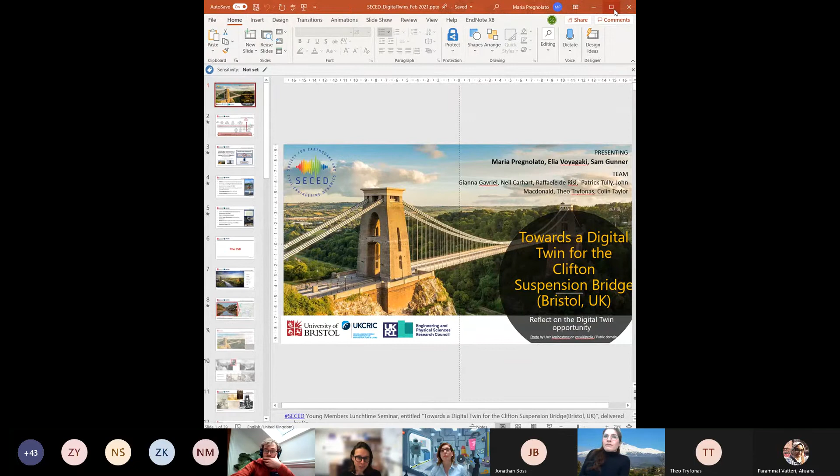Thank you, Valentina. Thank you so much for inviting me, for the nice introduction and everything. Can you see my screen? Yes, I can. Perfect.

So thank you so much. It's a pleasure to give this talk, especially because it's actually the first one we are giving on the first outputs of this case study and the future steps that we are going to encounter.

So the term digital twins has become very popular nowadays, and it's really propelled us into a sort of future dimension. But actually, the concept is not new at all, and has been followed by mankind for centuries. For example, even in ancient Greece, we can find mechanical twins of the solar system with which people were trying to study the movement of the planets. Of course, however, we have to wait for advancements in computing technology in order to really arrive at the difference that led to a digital twin.

The first contemporary digital twin can be found in the mission of Apollo 13 in the 1970s, when a digital virtual model of the spacecraft was built by NASA in order to understand the behavior of the object in space. So this is really seen as the first contemporary prototype of a digital twin.

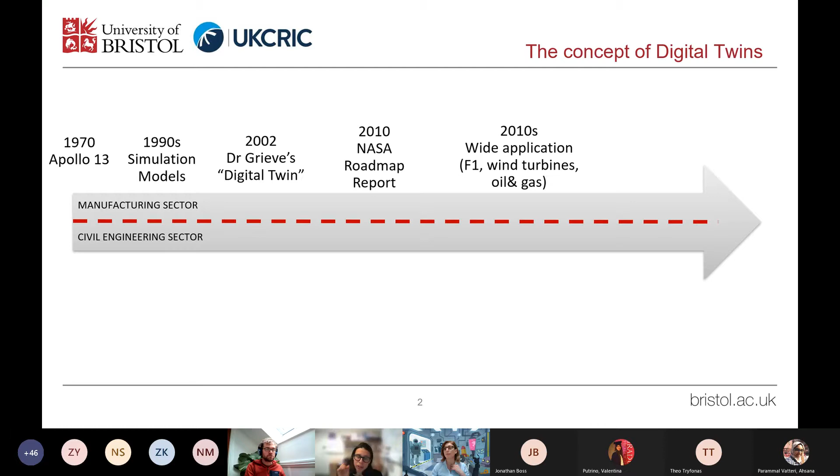From this year onward, digital twins have really flourished in the manufacturing sectors, especially in wind turbines, oil and gas, Formula One, and other production industries. However, it didn't really apply to civil engineering at this time.

We had to wait until 2015, when the Centre for Digital Built Britain was created in order to push the digital development of the UK. This is a very special group targeting the digitalization of the built environment and the wider architecture, engineering and construction sector, which underpins the report for the National Digital Twin for Public Good, and especially the Gemini Principles. The Gemini Principles is a very good report which underlines principles for twinning as a roadmap for bringing about digital twins.

These digital twins are seen as federated, as a system of systems, in order to provide the national twin for smart cities.

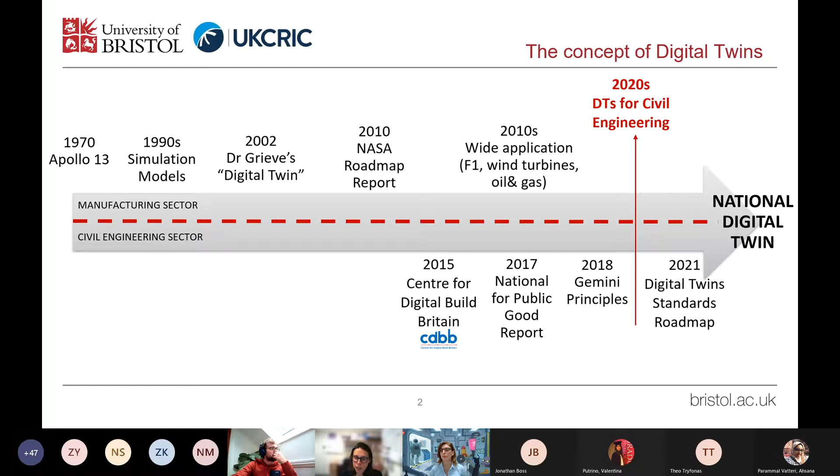Before getting to these points, there is still much work to do because digital twins for civil engineering have actually just started, especially in practical terms. Much work is still needed to bridge the gap from the theoretical level to the practical one. But what is actually a digital twin?

The digital twin component sees a real object, which is the real structure in the case of infrastructure or the real building, and then its virtual or digital counterpart. The important part between the two is constituted by the link, which is the connection made by data, historical information, and any other points that can make the connection.

Traditionally, this link has been considered at real time, so the updating between the real information and the virtual counterpart was made at near real time or just in time. However, for civil engineering, this concept has been reconsidered to be the right time—the frequency of the twinning rate that is more appropriate to update the virtual model. This depends on the scope of the digital twin: if the scope is just monitoring for regular maintenance, the right time could be once per month. However, if we are monitoring extreme events, this could require hourly updates. This concept of twinning is very crucial in the twinning process.

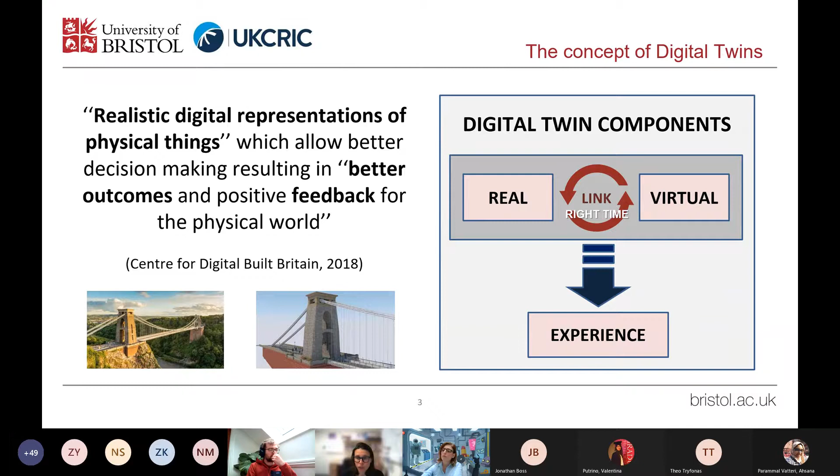The last step, which I call experience, is as important, because a digital twin is useless if it is not connected to reality. This experience includes all the operational context that makes a digital twin a responsive system. This could be, for example, the identification of thresholds that allow support or trigger decision making and management plans.

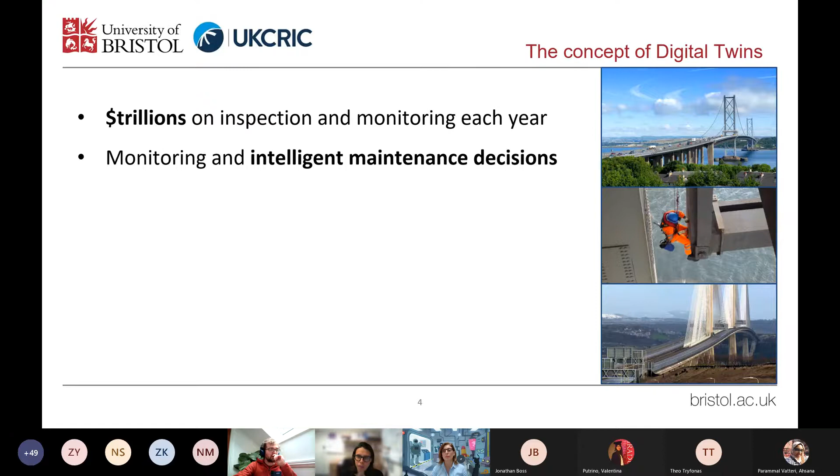So why build a digital twin? First of all, trillions of dollars are spent worldwide each year on inspection and monitoring. The traditional procedures for this inspection are not really based on smart or intelligent systems, but are quite visual. If I think about flooding procedures, for example, they involve divers, and all these techniques are quite expensive and even not very safe in many cases. It is predicted that by using digital twins for maintenance planning, for example, cost savings could reach up to 20–30%, and maintenance is just a part of what a digital twin can do.

So the investment in this case would be heavily compensated, because the digital twin can be used for design, construction, monitoring, equipment tracking, visualization. It's like having a tool for testing your options before they are deployed in the real world.

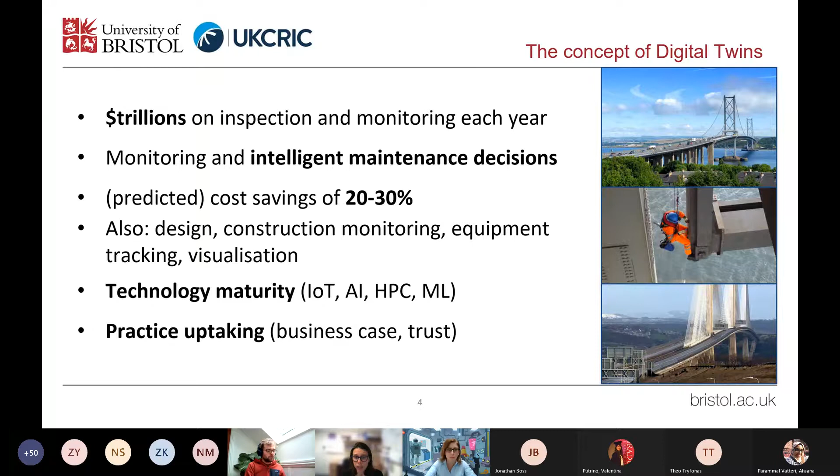Now is the right time to think about digital twins for civil engineering, because there is the maturity of the technology—think about the Internet of Things, artificial intelligence, machine learning. We have so many techniques a digital twin can benefit from. However, the practice uptake is a bit behind, especially compared to the technology advancement, since there is still a need to demonstrate the value of the digital twin, since it requires a very high range of expertise and costly equipment, so sometimes the business case behind it is a bit difficult to identify. Also, there is a need to develop the confidence and trust of owners and infrastructure operators in order to start using such a tool and change their routine and their forma mentis.

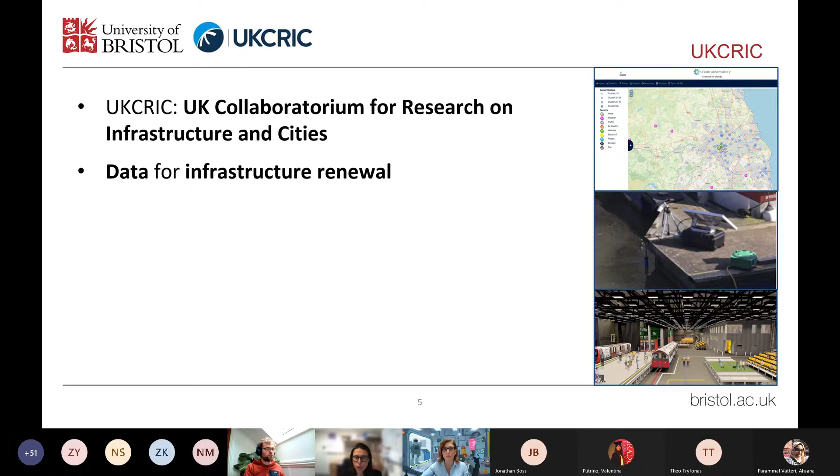This project is within a wider program called UKCRIC, the UK Collaboratorium for Research on Infrastructure and Cities. Essentially, UKCRIC is looking to create or collect data for infrastructure renewal in the wider sense. One of the tools of UKCRIC are the urban observatories and the city dashboards, in order to collect and create this data within an infrastructure that is functional for value delivery.

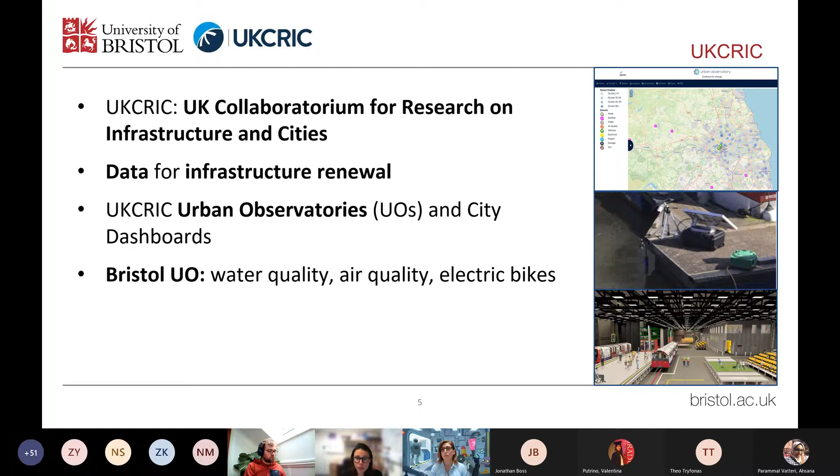In particular, in Bristol, we have one of these 8 urban observatories, and our focus has been on water quality, air quality both indoor and outdoor, and transport such as electric bikes. Of course, there is also the monitoring of infrastructure, structural health monitoring, and the Clifton Suspension Bridge is the case study for this topic.

Working with the Clifton Suspension Bridge has been really exciting for me, because it's amazing to use such a symbol and iconic structure for our city as a testbed. We were very lucky to have this precious relationship with its owners and operators, the Clifton Suspension Bridge Trust. The history of the bridge is also very much fascinating, and I think we were very lucky to have, and still have, the occasion to work with such an infrastructure. But now I will leave Elia to talk more about the bridge.

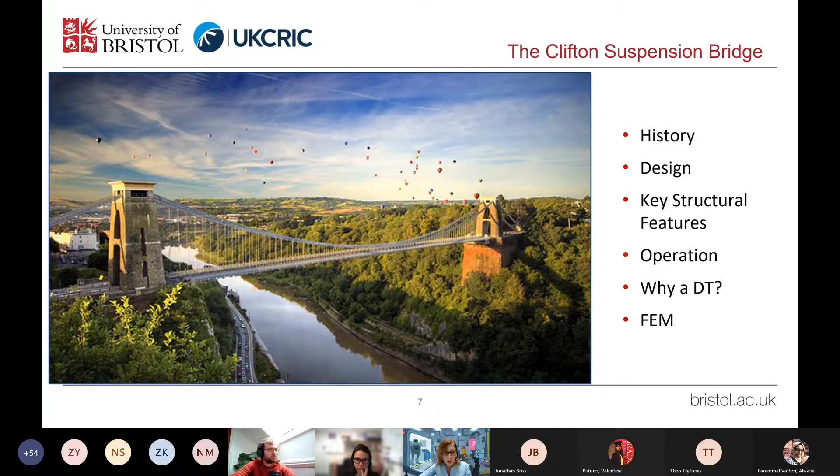So let's start with some facts about the structure itself. The Clifton Suspension Bridge is spanning the Avon Gorge and the River Avon, linking Clifton in Bristol to Leigh Woods in North Somerset, and forms part of the B3129 road. Since opening in 1864, it has been a toll bridge, the income from which provides funds for its maintenance.

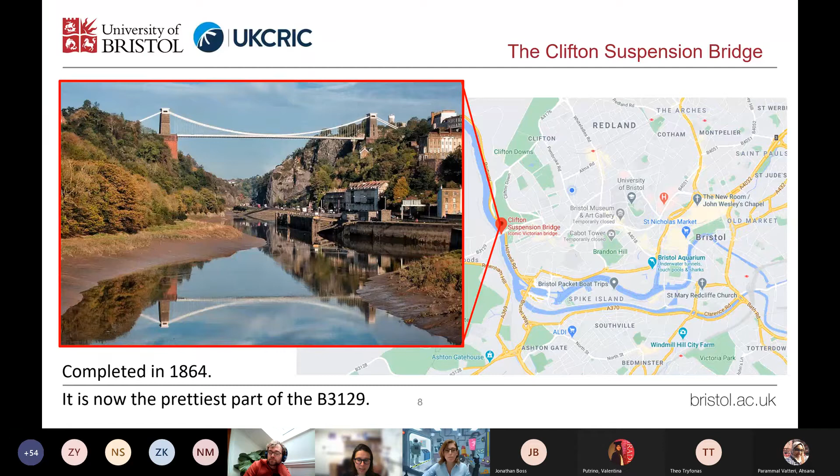So the history of the bridge is fascinating. It begins in 1754 with the wish of a wealthy Bristol wine merchant, William Vick, who made an investment of £1,000, indicating that when this figure reached £10,000, it should be used for the purpose of building a stone bridge that would connect Bristol to Somerset over Avon Gorge, and also because of its height would allow large ships to travel on the river.

In the 1820s, Vick's legacy was close to £8,000, but it was estimated that the stone bridge would cost 10 times more. So, by means of a parliamentary decree, an iron suspension bridge was allowed to be built in place of the stone bridge, and they started to collect fees for the construction. In 1829, there was a competition to choose a project for the bridge.

The judge, Thomas Telford, who was also a designer, rejected all other designs by insisting on his own design. So a second competition was held with new judges, and Brunel's design was the winner this time, with a suspension bridge with Egyptian-influenced towers. So they purchased the cables, they built the towers, and then in 1843, before adding the Egyptian-style finish, they ran out of money. They stopped, and they sold the cables, which were then used in another project by Brunel, the Royal Albert Bridge in Devon.

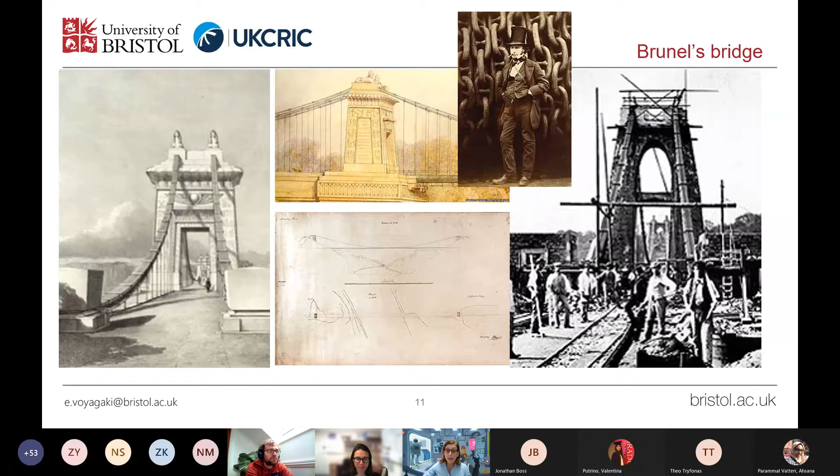In 1859, Brunel dies. His colleagues, considering that the completion of the bridge would be an appropriate memorial, started a campaign to raise new funds to complete the work. So Brunel's design was then revised by two eminent engineers of the time, William Barlow and John Hawkshaw.

The deck was replaced by a wider, taller, and more robust one. The two chains initially proposed by Brunel were replaced by a three-chain catenary system. The towers remained in rustic stone and without the Egyptian finish. Construction resumed in 1862 and was completed two years later in 1864.

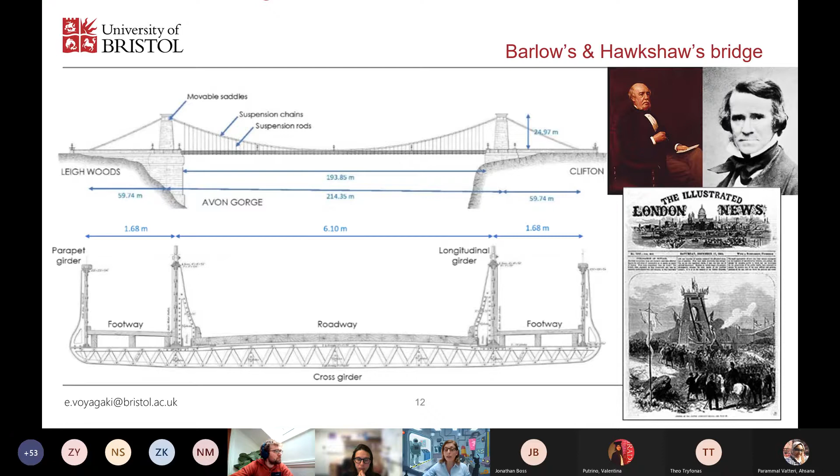But let's look into more detail at the structural characteristics of this wonderful bridge, which is very unlike any modern bridge that would be built today. It is much more dynamic than a modern bridge, lighter and more flexible. It is made of wrought iron, wood and stone. It has a span of 214 meters and a width, including pedestrian crossings, of 9.5 meters. The height of the towers is 25 meters, and the deck is relatively light, made of timber with wrought iron lattice cross girders in line with each pair of 82 iron suspension rods hanging 100 meters above the river.

The suspension chains supporting the bridge on each side of the roadway are formed as a system of 3 wrought iron sub-chains, arranged one above the other. These sub-chains are made of long iron bars with special eye joints at their ends. Each link of each chain is formed by 10 to 12 bars arranged side by side. Suspension rods are attached every 2.5 meters to each of the 3 chains in turn.

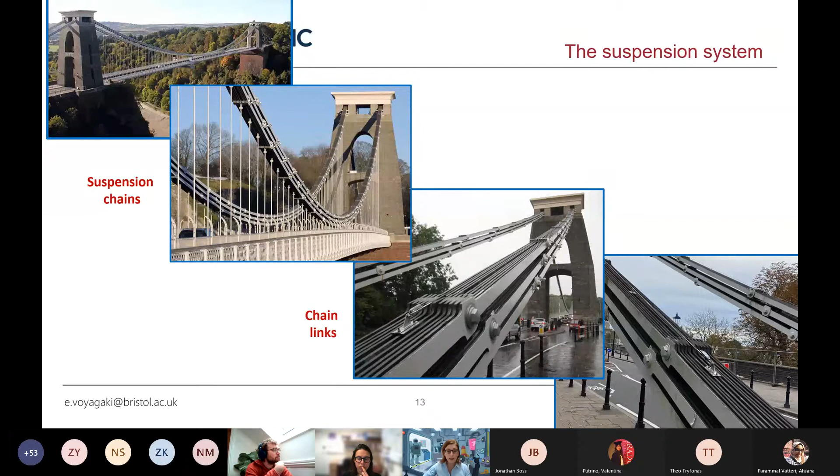A key part of the catenary system is the main span chains. The main span chains and the anchor span and anchor chains are connected at the top of the towers through a system of vertical iron plates bolted together, between a pair of iron castings sitting on a cast iron plate, on rollers which run on another iron plate.

As I don't know if you can see clearly in this picture, the anchor chains are supported through land saddles that guide the chains through a 25-meter shaft inclined at approximately 45 degrees to reinforced anchorages. The tower rollers facilitate changes in catenary due to load or temperature changes, and also minimize the transmission of longitudinal forces from the chains to towers and land saddles. This is possible only given that the saddles are free to move.

If they stop moving, this could significantly increase the stress on the rock abutment, and this abutment is a natural structure, so exact operational stress thresholds are not easy to measure. There is therefore an operational imperative to ensure that the frictional coefficient of the saddles is kept low.

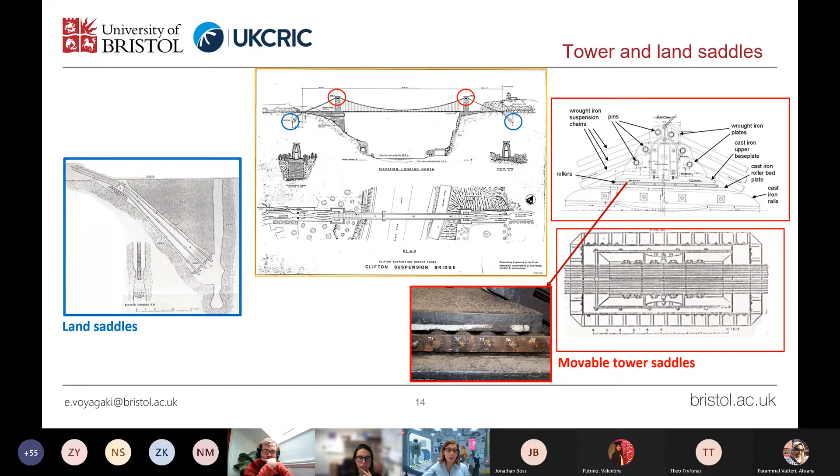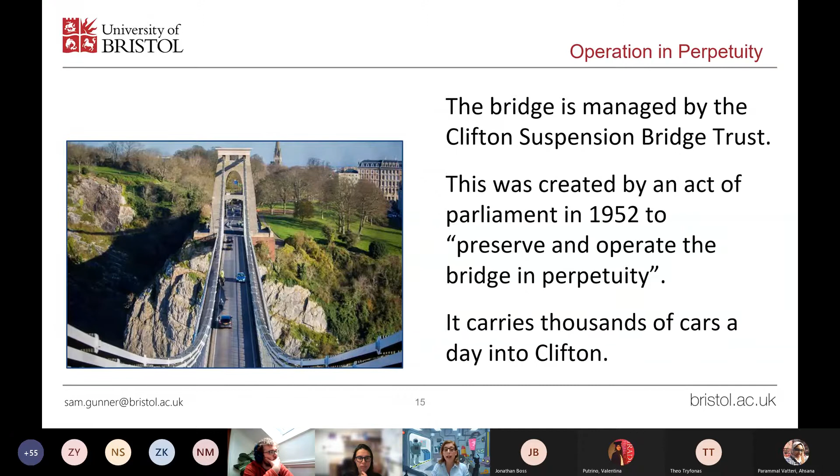In terms of management, the bridge is managed by the Clifton Suspension Bridge Trust, who since 1952, by an act of parliament, have to preserve and operate it forever. This is not a simple task, as the bridge is a very important route into the city from the south and carries a lot of traffic. The annual flow is 3 million vehicles, as well as pedestrians and cyclists. Moreover, it is one of Bristol's more visited tourist attractions in its own right.

So how can we support the Bridge Trust in their mission to operate the bridge forever? And what information could we produce to support their decisions? There are a lot of considerations that impact the operation of the bridge.

The supporting rods have been known to break in the past, and an ability to predict this would help optimize maintenance. The rock abutment on which the Clifton Tower sits is a natural structure, and so strength cannot be guaranteed. Can anything be done to minimize the load on the abutment? We just mentioned the saddles.

The bridge deck is much more flexible than in modern bridges. I'll get a bit into the detail of what this means in a second. But the result is that the bridge is more susceptible to something called flutter, which is induced by high winds. All these are operational considerations, information about which might help the bridge master keep the structure operational for as long as possible.

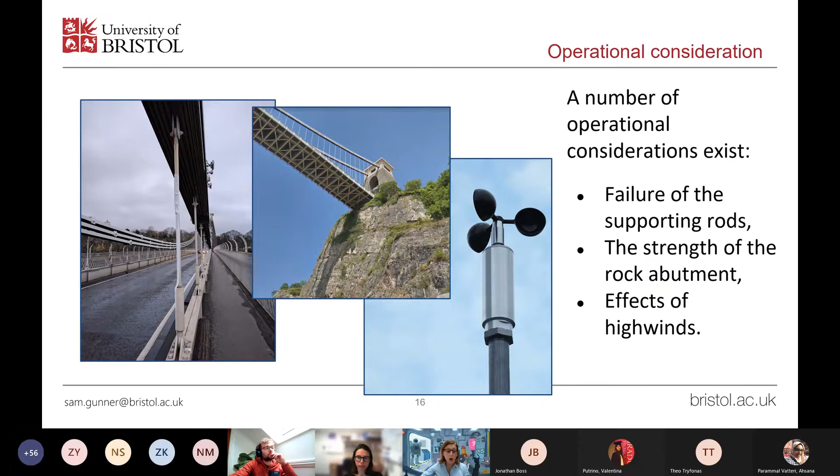Now, we don't have an operational digital twin yet, but we are working on it. I'll go through some of the components that we do have to give you a flavor of what it will involve. A big part of the digital twin is the finite element model of the full structure that should be in conversation with a monitoring system and use the data towards predicting critical response patterns, as well as update its properties using real observations and data.

For example, critical components requiring monitoring are the response of the iron chains, the stresses on the chain, and the movements of the tower saddle. We have collected as much information as possible with the help of the Bridge Trust and COWI, as well as from John MacDonald and the previous work from the University of Bristol team.

Blueprints of the bridge, details, reports, published papers, as well as two previous full 3D finite element models, one completed in NODLE from COWI and one in ANSYS from the University of Bristol.

Based on all the available data and existing models, we are building two novel finite element models, one using Midas and one using OpenSees. Midas was selected as a first step, as a calibration model, if you like, against previous models and, more importantly, experimental data. However, it has limitations. It is highly idealized, and using commercial software is not the way to go if you want to interact with the data. So there are no model updating options here.

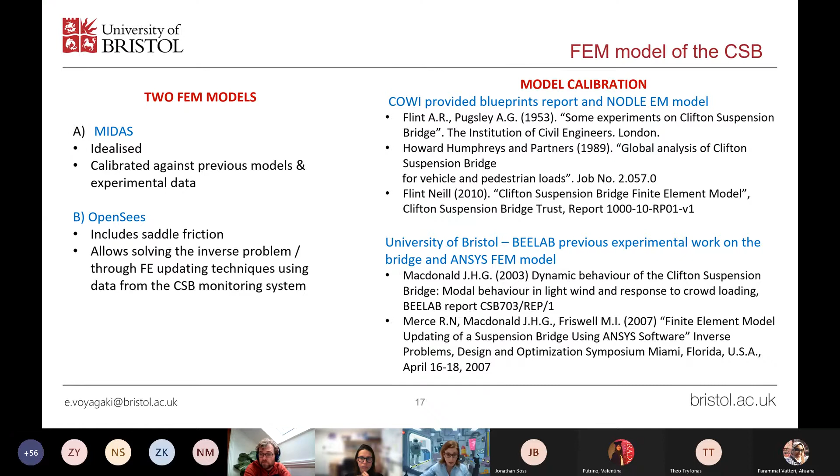Here is an illustration of the geometry and key structural features embedded into the MIDAS model we developed together with Dr. Raffaele De Risi. As already mentioned, it serves as a first step, the calibration step, before building the OpenSees one. It is a three-dimensional finite element model.

The geometry and cross-sectional properties of the bridge are based on the COWI NODLE model, and it has three main advancements with respect to previous models.

It includes interactions of the suspension rods with the suspension chains. The boundary conditions modeling the tower saddles have been modified to better represent the actual behavior, and the deck constraints have been calibrated to better match the experimental mode shapes.

All structural components have been included, excluding the towers, which have been considered rigid. The deck inclination was based on the levels, as you can see here, measured during the survey that was carried out in 2007 on the bridge.

And the deck cross-sections are user-defined. They represent the geometrical properties of the wrought iron. We have modeled the three separate chains. And the deck and suspension chain cross-sections are modeled as beams.

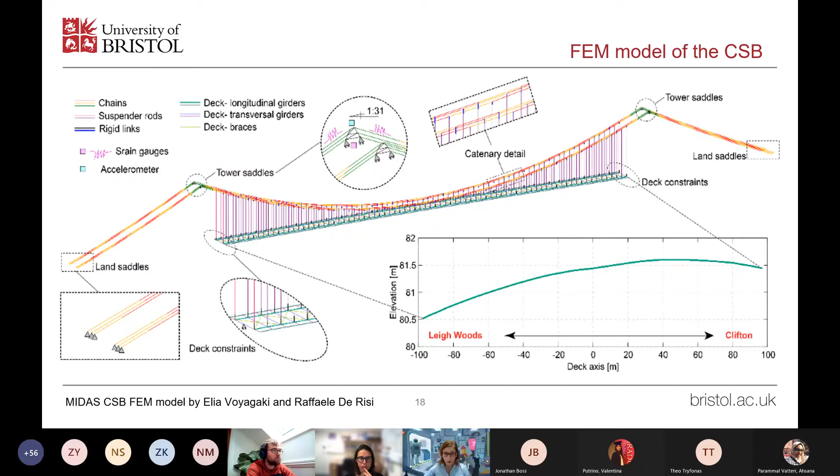Now, if we go to the next slide. Now, how do we know that our model is realistic? How do we know how close to the actual structure our model is? The answer is that if we don't have data to calibrate it, we don't know.

But in our case, we did have data. And first of all, we have measurements of the dynamic response of the bridge. Detailed vibration measurements were taken by a colleague at the University of Bristol, Professor John MacDonald.

27 mode shapes with the natural frequencies below 3 Hz were identified. Here you can see a selection of these shapes, which were used to calibrate the model.

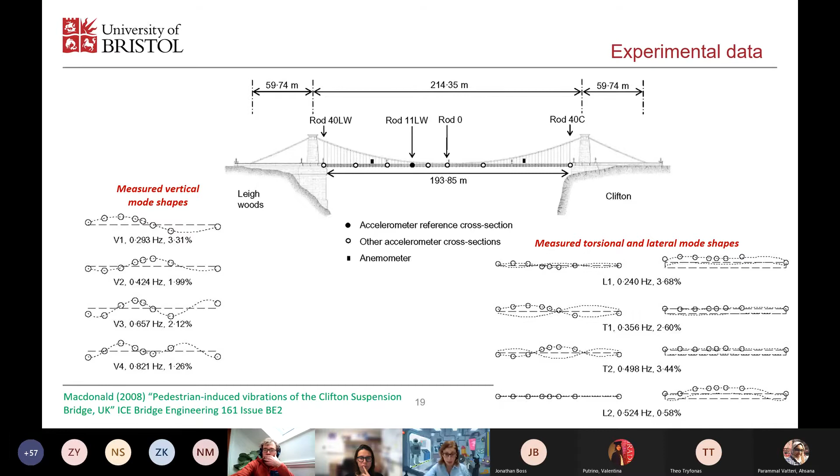So if we go to the next slide, we can see the experimental data used to calibrate the numerical model. We used a modal assurance criterion, the MAC, to compare experimental and numerical shapes, and we got a very good match. The mean MAC for all the vertical modes was

0.973. To give you an idea what this means, values larger than 0.9 indicate consistent correspondence between the shapes. A very important remark here is that it took us 50 iterations to get there. Without properly calibrating your model against actual data, the discrepancies between your model and the actual structure will be huge.

Which features of the model need to be calibrated? It is a long and painful process involving the boundary conditions - how you constrain the movements of the deck, for example, how you model the saddles, how you model the chains, what type of elements you choose for the suspension rods.

And this is something engineers should always keep in mind: that no matter how advanced the software they use might be, or how detailed their model might be, if they want to be realistic, they need data.

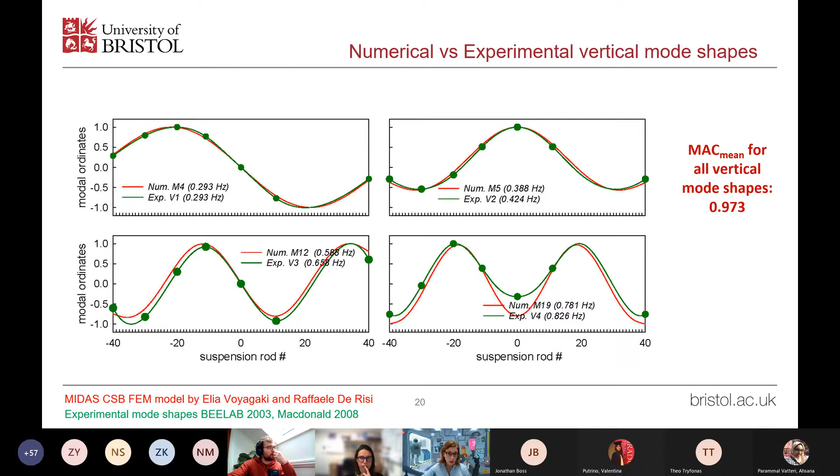So the next figure shows the numerical mode shapes in the calibrated Midas model. I won't stay long here. And the next figure,

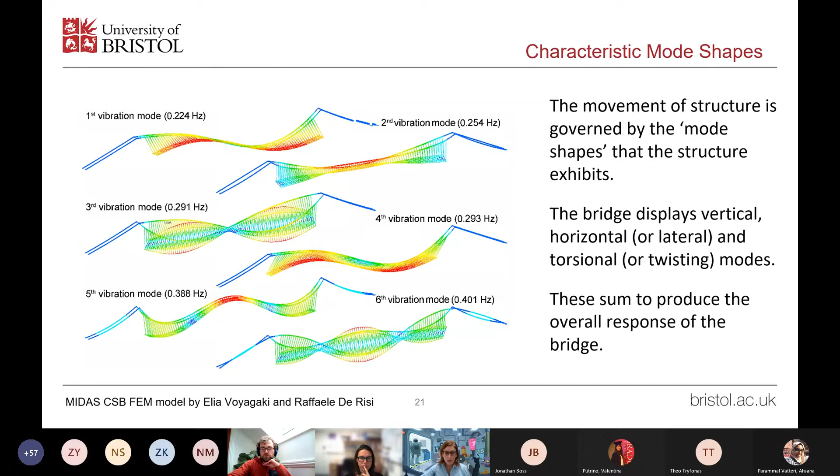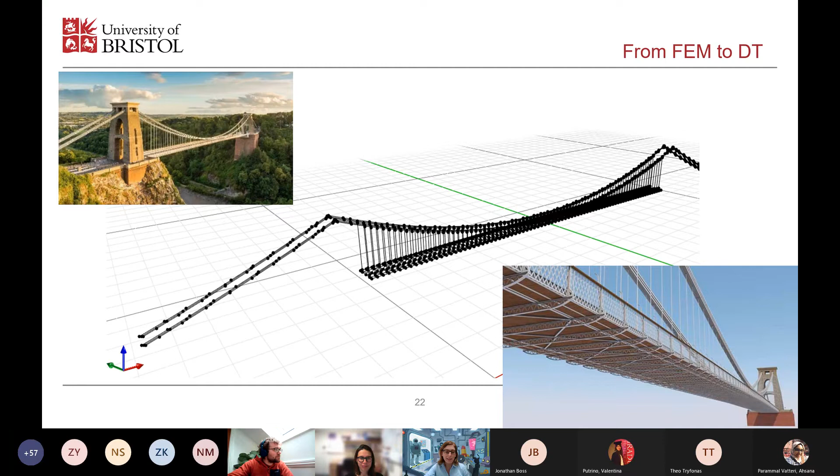Yes, now you will be thinking, okay, that's all very nice. You have shown us your finite element model of the bridge. How do you go from the finite element model to the digital twin? This is a very exciting part of this story that Sam will elaborate on in the next part of this presentation. Thanks for listening.

Cool. Thanks, Elia. I think I've remembered to unmute. Oh yeah, no, I can hear myself, so presumably everyone else can hear me as well.

Right, so how do we get from a model that Elia has described to something that's automatically updating and validating itself based on sensor data? Well, the first thing we need is some sensor data to compare against our model.

I'm going to discuss an initial deployment of a structural health monitoring system on the Clifton Suspension Bridge, and then move on to our plans, funded partially or completely by UKCRIC, to turn the bridge into a flexible monitoring testbed with a lot more capability and functionality, delivering the sensor data we need to build our Clifton Suspension Bridge digital twin. We've been working with the Clifton Suspension Bridge Trust for quite a number of years, and the first time we deployed sensor technology onto the bridge was something we called the Clifton Suspension Bridge dashboard.

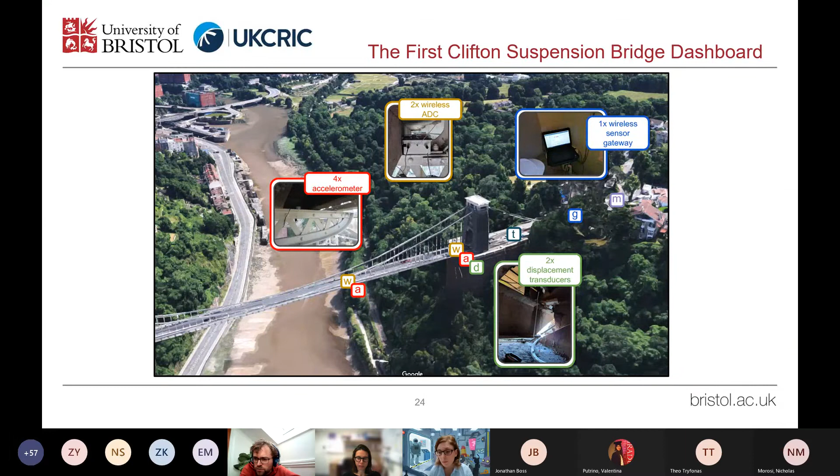If we go to the next slide, please Maria. I feel like Chris Whitty.

The laptop you see there was the wireless sensor gateway, used for managing all the data, at least on site close to the bridge. Data would then be forwarded onto servers at the university.

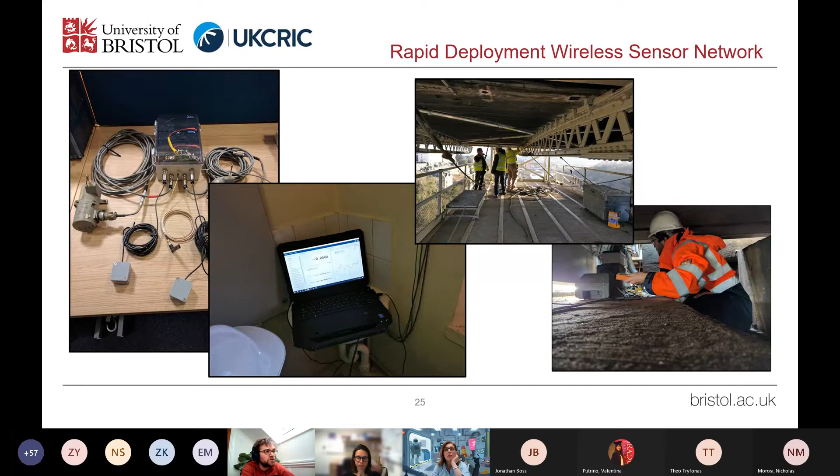This was battery-powered technology, so it couldn't be used for long-term deployments, but because it was quite straightforward to deploy by a single person - it took longer the first time since we were working out what we were doing, but after that we deployed it a couple of times, and by the third time it could be deployed by a single individual in only a couple of hours. So it was useful if we knew there was going to be some unique event worth monitoring, like a sponsored walk that went over the bridge, and we got some very interesting data.

Next slide please, Maria. There we are, thank you.

It was able to do the synchronization that obviously you need if you're going to be using this for inquiring into structural health monitoring and structural modes and that sort of stuff. But the reason the Lord Microstrain equipment was very useful and worked well for us is because it has a completely open Python API, which means you can wrap your data collection into a much larger software environment, and that's very important in integrating into a digital twin.

A digital twin is going to have to be able to read all this data and do something with it, and for the digital twin software to be able to do that, there need to be application interfaces for receiving the data, and it needs to be comprehensible and understandable to the digital twin in a way that allows the rest of the software environment to use the data. Also important is the ability for the system to shift the data around in a way that different applications and parts of the software package can use.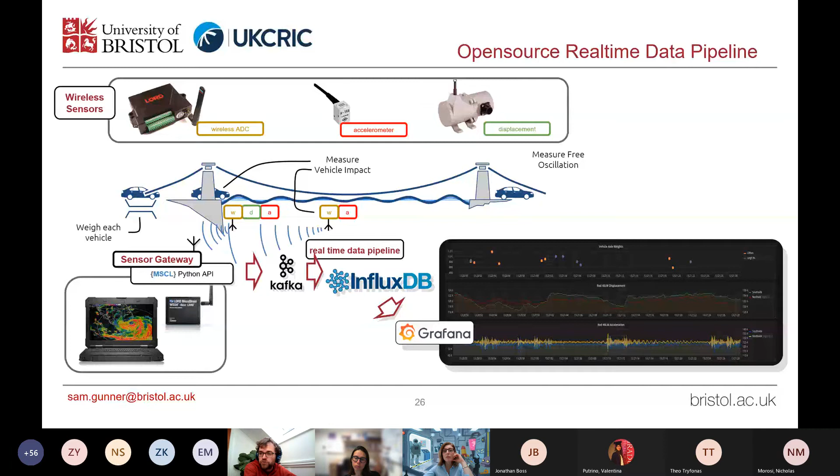The last part of the data sync, to some extent, when it came to the Clifton Suspension Bridge dashboard, was the visualization of the data, which we did through an interface called Grafana, a graphical user interface. If I go to the next slide, please. Thank you. And this is a brief animated GIF of what the Clifton Suspension Bridge dashboard looked like when it was deployed the last time.

We're currently between deployments, as I'll mention in a sec, but you can see the displacement at the top, so the amount the bridge deck is going up and down, in millimeters. Then the two plots below are at two different locations showing vibration information, and the last plot is the information from the weigh-in-motion machine, or the WIM as it's sometimes called, which measures the weight of all the vehicles as they enter the bridge.

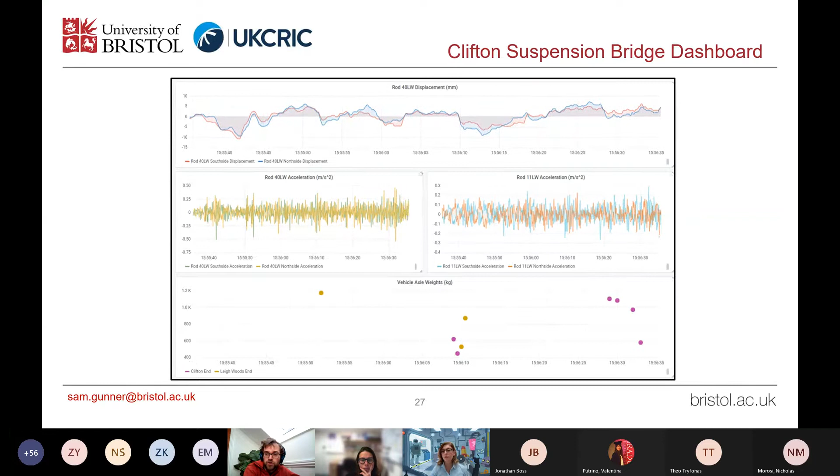Actually, it's a bit more complicated because the weigh-in-motion machine is an operational sensor run by the Clifton Suspension Bridge Trust to make sure that vehicles that are overweight are flagged and aren't allowed onto the bridge because they might do it damage. But we were able to negotiate the necessary agreements with the supplier of that technology to get the data from that machine. That gives us more of the system input, the loadings and things being applied to the bridge as we were monitoring it, and allows us to understand the structural dynamics a lot better.

So that was the previous deployment. Now we're looking at being able to do something much more sophisticated and much more flexible, and a lot of that revolves around facilitating the rapid deployment of technology that can be left out for a longer period of time. Previously, the batteries were a limiting factor—they could only last a month or so, or a couple of months if you wound down the sample rate. But now we have a mains ring installed out on the bridge.

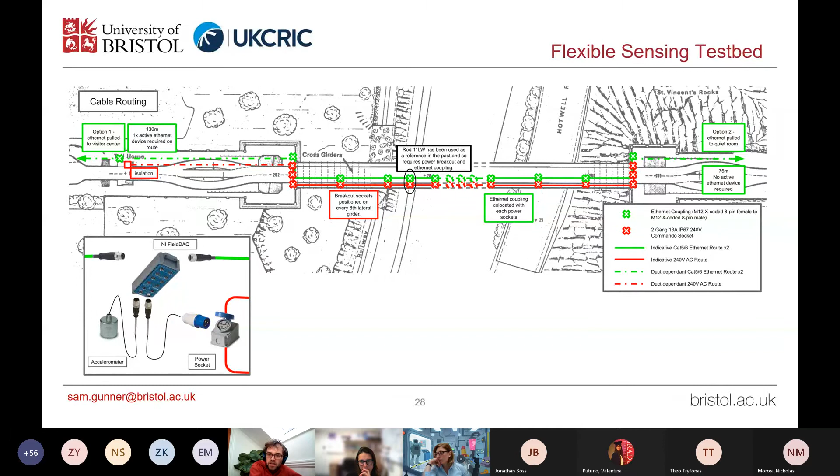This gives you a little bit of an illustration of where it is. We've got 12 points along the bridge that we can connect sensors into. We also have a Cat6 Ethernet ring out there. We haven't quite worked out the route back - well, we've worked it out, but the cables haven't been pulled back to where the server is going to be. But we're now going to have a dedicated server installed, not in the toilet, which will make a big difference, so we'll be able to very quickly deploy sensors. The illustration in the bottom left-hand corner is called a FieldDAQ, a field data acquisition unit. That particular one's from National Instruments, and we'll be able to plug in whatever accelerometers, displacement transducers, or whatever sensing we need underneath the bridge deck. It'll be powered by mains power, and then we'll have a very robust Ethernet connection back to the monitoring server we'll have.

Next slide, please, Maria.

Understanding that is very important, but we haven't entirely worked out all the complexities yet of monitoring temperature out in those locations, because it's very difficult to get to the chains without all sorts of harnesses and that sort of thing. And then how do you do the battery swapping and all sorts of things? So there's technical challenges to overcome, but certainly when it comes to the vibrations, displacements, and anything below the bridge deck, our flexible test bed enabled by the power and comms will make the deployment of technology a lot easier.

We're also hoping to integrate more of the operational sensors that the Clifton Suspension Bridge use, such as CCTV cameras using computer vision for monitoring vehicle locations, as well as the weigh-in-motion machine and the toll barriers, which we already have visibility of. So that's the plan when it comes to what we'll put out on the bridge.

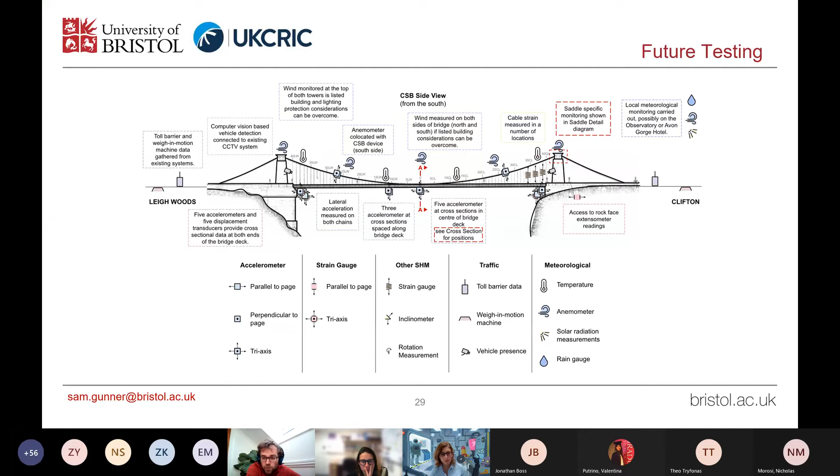We have a range of sensors that we've bought through UKCRIC that we're - well, not just sensors, but also a lot of the supporting technology you need to enable these sensors. So sensing technology, what's referred to as data acquisition, to convert the raw sensor values into something more easily transported and managed in a database, the networking, and then compute power, processing resource. So we've got quite a lot of different capabilities bought under UKCRIC, including all sorts of very exciting things, like computer vision based strain gauges and that sort of thing.

Part of the flexible test bed, or the idea behind it, will be understanding how we can combine all of these different sensor technologies to inform the digital twin.

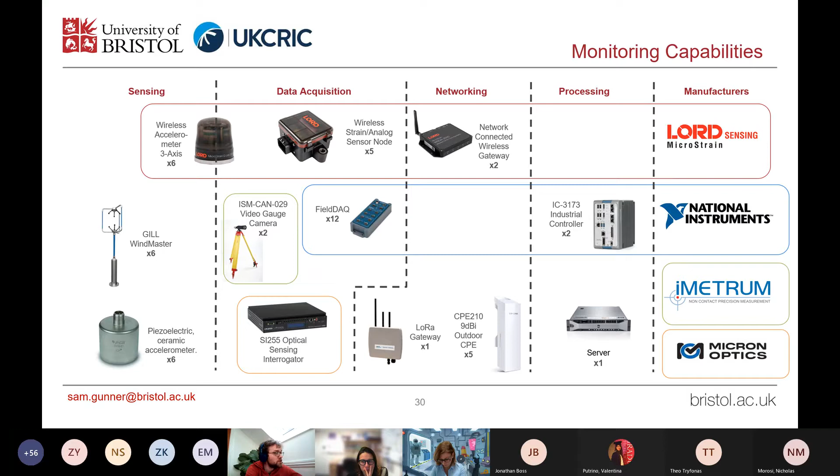Going forward, next slide, please, Maria.

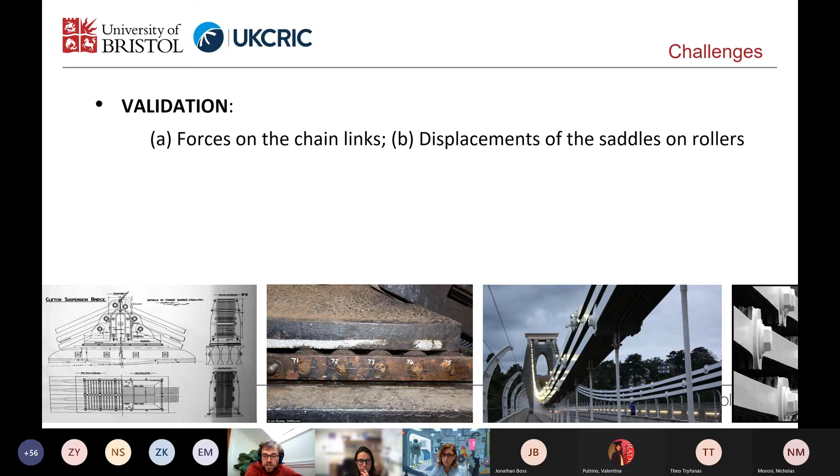When it comes to the data, well, collecting data is only part of the challenge. A big challenge when it comes to developing a digital twin is the complexity around doing automatic model validation. As Elia mentioned, the sophistication of the finite element models - there might be tens of thousands, hundreds of thousands of different parameters within a finite element model. Many, possibly all of which could be updated, or need to be updated, for the finite element model to better match the real world structure. Using engineering judgment is currently how the model is updated, but if you're going to do that automatically, programming that into a computer is very complicated, and there are obviously uncertainties associated with it. So there's a real challenge there.

Further challenges are surrounding data. Data is obviously a huge part of any digital twin, and there are complexities not only around the security of the data, as we saw when working with the Clifton Suspension Bridge before - they weren't keen on the data being made public because of the insight it might give to someone.

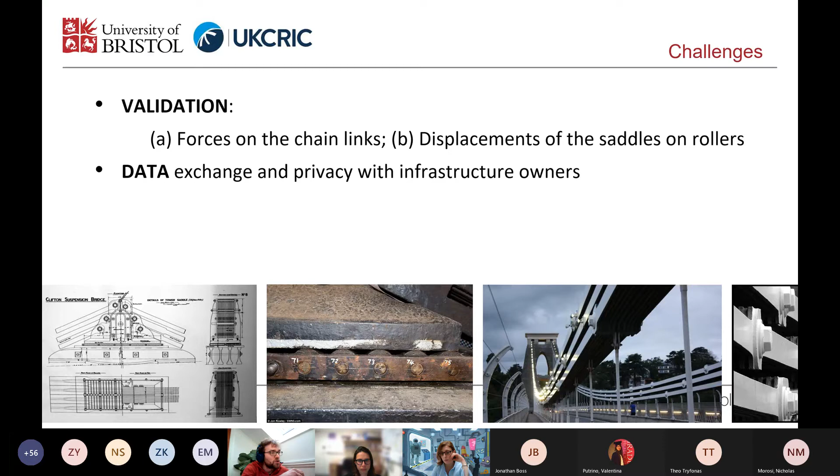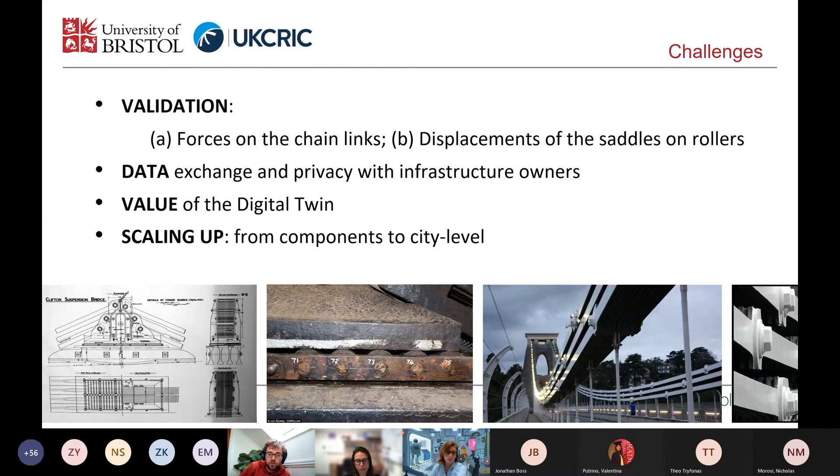One of the big challenges with digital twins is convincing the industry that they present value. So one of our key challenges has always been, when working with the Clifton Suspension Bridge Trust, to make sure that we're including them and addressing the problems they perceive when it comes to the operation of their structure. That's one of our key targets.

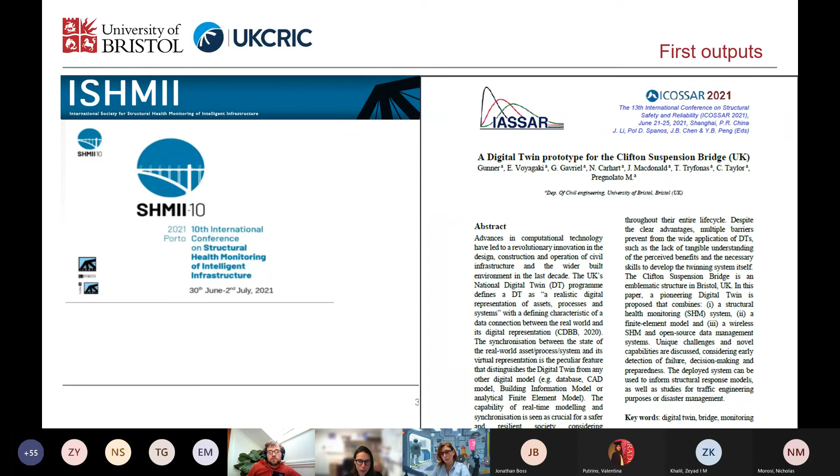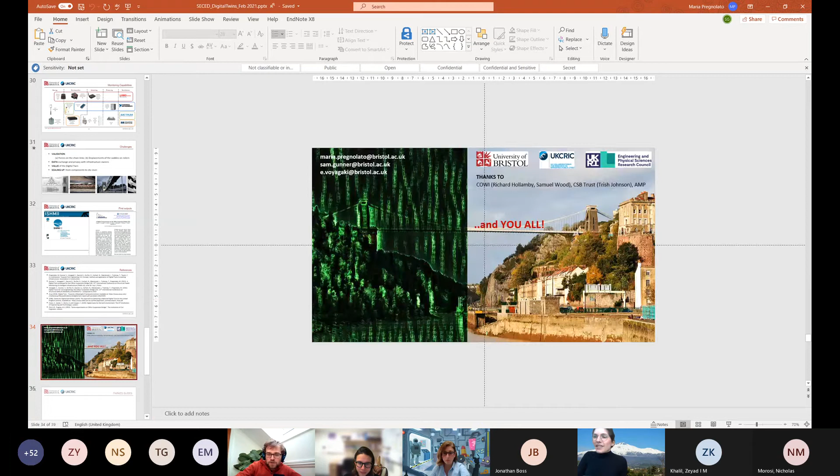Thank you very much, very interesting presentation. Let's wait for questions if anything. I have a question for Sam and Elia: at which stage did the work that Sam did help refine the model that Elia developed, and which parameters did you find you needed to further adjust, change or improve?

If I take the first part, the sensor data allows you to understand empirically the mode shapes Elia was talking about. When she showed the diagram of the different mode shapes of the bridge, that sensor data allows you to generate those mode shapes from the structure itself. A lot of the past work involved deploying sensors along the bridge, seeing how it vibrates in different locations, and from that you can see what the actual physical mode shapes of the structure are. So when building the model and outputting the mode shapes, she can see how accurate they are, which allows for validation.